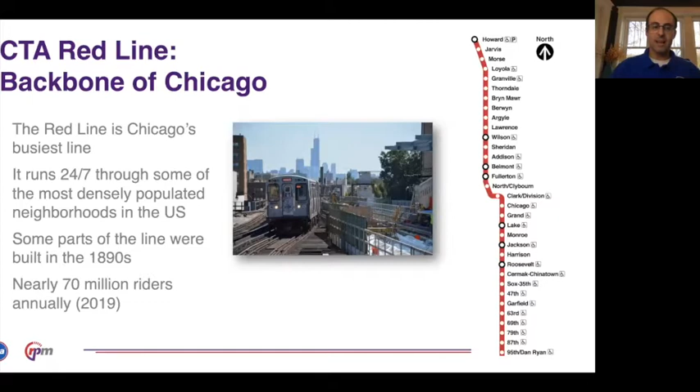Parts of the line date back to the 1890s. The parts that RPM is dealing with date primarily from that period, as well as the 1920s. Basically north of downtown, it is pre-war in vintage. The middle section in the State Street subway dates from the 1940s, and then the south end in the Dan Ryan Expressway dates from the 1960s. As I mentioned, it's CTA's busiest line, with 70 million riders annually last year.

So the RPM project, Red Purple Modernization, actually involves more than just the red line. The complete umbrella program will rebuild all red and purple line stations and track systems all the way from Linden, at the far north end of the purple line in suburban Wilmette, through Evanston, through the north side of Chicago, down to Belmont.

That corridor from Linden to Belmont is 9.6 miles. Reconstructing that entire length not only would be incredibly complex, but expensive to do all at once. So the project is broken up into multiple phases.

The goal of the project is to add capacity and, of course, to prolong the service life of the infrastructure, most of which is reaching end of life.

The current project is really just phase one of RPM. It began in 2019 and will run through 2025. The areas which I'll go over in just a moment for phase one were chosen for the initial project because they will bring maximum benefits to CTA customers across the rail system.

Parts of it were some of the most deteriorated, but they also, being at the south end of the corridor, will benefit not only customers who actually live in the immediate project area, but the customers coming from farther north in the corridor all ride through this section. So the capacity improvements it will bring, as well as the improved infrastructure, will benefit everybody who rides through that corridor.

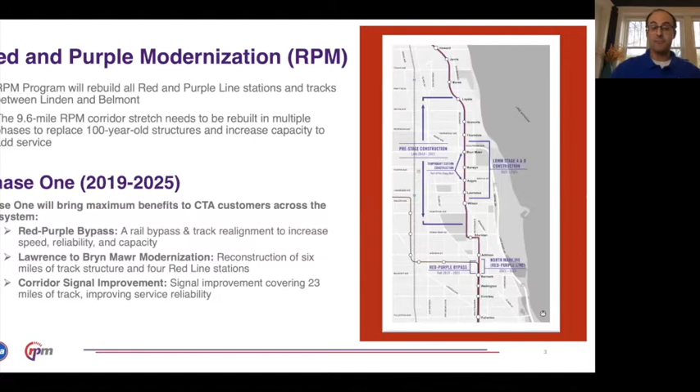The Lawrence to Bryn Mawr Modernization is the reconstruction of 6 miles of track structure and 4 red line stations, a little bit farther north between Lawrence and Bryn Mawr stations. And then the corridor signal improvement improves the signal systems across 23 miles of track, which will improve service reliability.

So phase one has benefits to both riders and the larger community. The new track structures, bridges, viaducts, and signals will provide faster, smoother rides. They'll also be quieter, so we'll be a better neighbor to the communities that we operate through and next to. They will permit more frequent and less crowded service by increasing the capacity through the corridor.

The 4 red line stations in the Lawrence to Bryn Mawr area will be rebuilt to not only be in better condition, but brighter, safer, and fully ADA accessible.

Besides the physical improvements this will bring, it also brings economic development and growth, both through our investment in the system and in the communities, but also through workforce development. The construction brings a lot of economic and work opportunities, particularly for increasing SBE and DBE participation. And then post-construction, there's going to be a lot of opportunity for transit-oriented development to bring investment to the communities that our stations and infrastructure will buttress.

The project, phase one, is funded through a few different mechanisms. The bulk of the federal funds come from the Core Capacity Program. We were actually the first recipient of Core Capacity funds. It was a capital funding program that the federal government created to help legacy systems like CTA that need investment in order to remain viable and efficient and in a good state of repair.

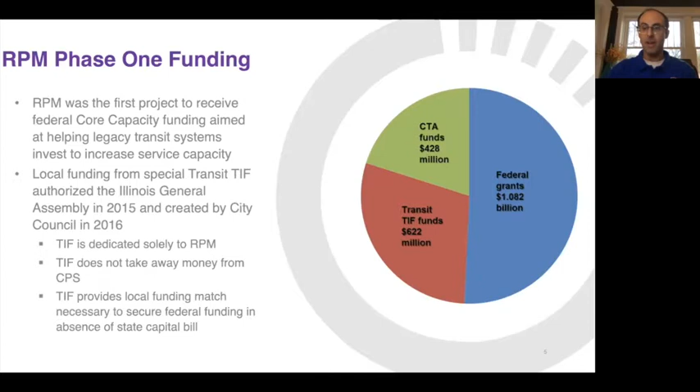Any property value increases that occur within the TIF district, CPS will see those benefits rather than all of that extra money going to RPM.

So some key issues and challenges for the project, and Chris is going to talk about these in more detail in the presentation further on, but just to touch on them briefly.

One is replacing a 100-year-old structural system is always a great challenge. It's a challenge for staging, it's a challenge for what you're going to find, particularly for a lot of the distance in the LBMM area, the Lawrence to Bryn Mawr area, which is a solid fill embankment.

So it's a little bit of a mystery box, sometimes what you find in a 100-year-old embankment like that. But it's also being performed in a densely populated urban environment, so this creates not only practical challenges in terms of getting material in and out and staging for construction, but also we have neighbors who are right against our work zones. We need to be good neighbors to those communities, so that provides a challenge as well.

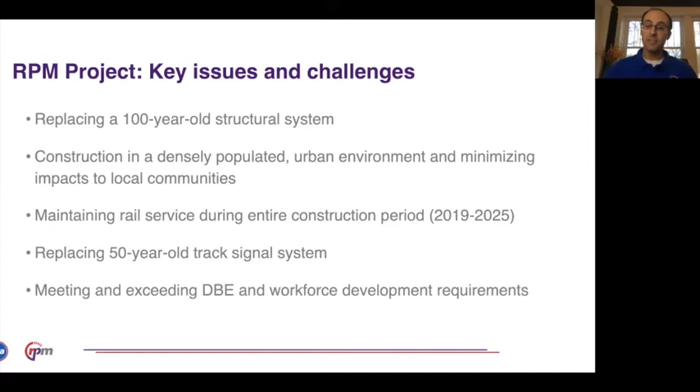Another challenge is that very few CTA projects are greenfield projects. We're rarely building on virgin land. In this case, we have to keep our busiest rail line, the Red Line, operating through this project, so maintaining rail service during the construction period is a big challenge. Replacing the 50-year-old signal system and systems integration is always a challenge for a project like this. And then meeting and exceeding DBE and workforce development requirements also poses some interesting challenges.

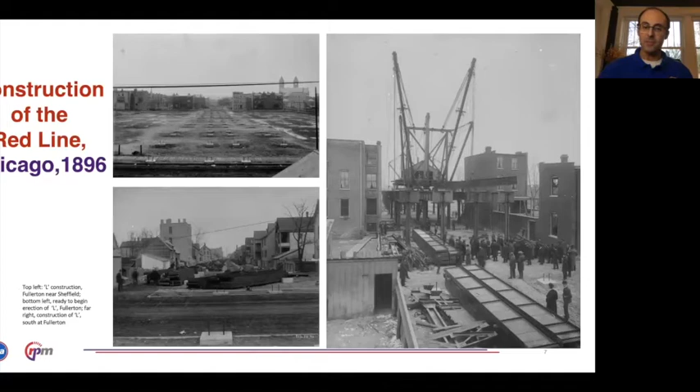So briefly, just a few photos for some context. As I mentioned, some of the infrastructure we're dealing with dates back to the 1890s. Here we see the construction of the southern portion of the project area. Top left is construction of the 4-track elevated structure near Sheffield and Fullerton. Bottom left, same area, ready to begin erecting steel, which you see on the ground. And then on the right is the hoisting and placement of the steel structure. So this is what it looked like when they built what we are now replacing 100 years ago.

At this point, I think I'll turn it over to Chris to speak to the current conditions and dive into some of the meat of phase 1.

Well, thank you, Graham. I want to talk for just a second about two people who are key to this project, one of whom is Graham Garfield. So many of you know Graham through this organization, and what an amazing job he's done with the CTA for a number of years. He has a unique position with this project in interfacing with our operations group, as well as providing important day-to-day communications directly to our passengers, coordinating those communications going out through our various operations outlets, and then coordinating a larger message with our media and government community relations folks.

But also in advancing many of the standards for communication and signage that we see in the stations. So those of you that know him know that he doesn't need a lot of introduction in terms of the various roles he's played in the CTA. He has quickly become a key figure for us as we expand our presence on the railroad and need to have an incredible amount of communication and coordination with our major operations groups in rail and bus. And that, along with his historic perspective on the CTA, makes him an invaluable part of the project.

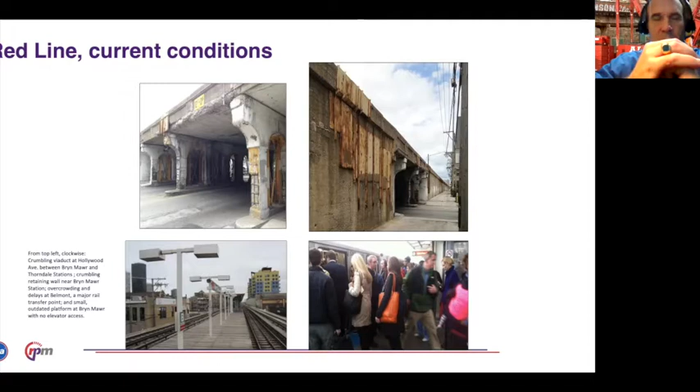One driving reason we selected this stretch, the Lawrence to Bryn Mawr segment, rather than the northernmost of the main segments, is because it was one of the largest blocks of inaccessible stations in our system, and an area with a lot of transit-dependent folks who weren't able to use transit efficiently, because many people with physical disabilities had a hard time getting to and from some stations. So breaking up that block not only provides better throughput, better stations, and the developments Graham listed, but it also breaks up this block of inaccessible stations on the northern end of the Red Line.

So, key dates. We started this project in 2018 with advanced utility relocation. For those of you involved with Metra or other transit agencies, clearing your utilities out of the way in advance, plus purchasing all your real estate in advance of bringing your contractor on, was a key part of this project.

I talked a little about Steve earlier — this was something he really helped set up and bring about. It was a brilliant idea that has worked very well for us. We've eliminated many, if not all, of the major utility conflicts we would have faced on a job like this had we not designed and planned ahead of procurement where the structure was going to go, how it was going to work, and then cleared the utilities.

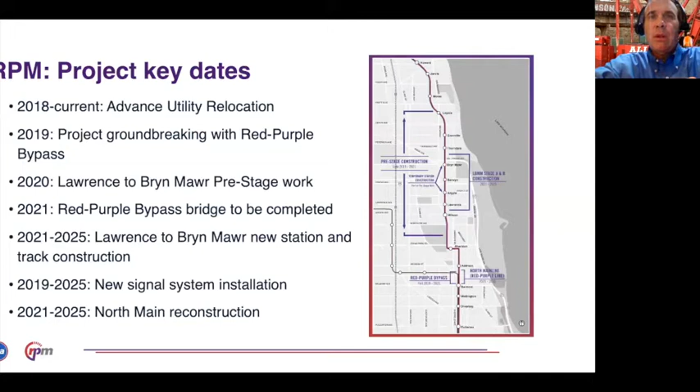What we're endeavoring to do with the bridge under is to take out some of the most prominent of those restrictions, again increasing our ability to provide throughput, and ultimately to provide safer and greater capacity to our customers.

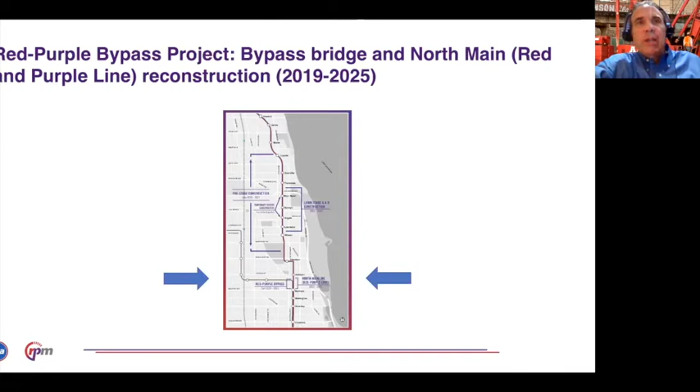Okay, so we're going to talk a little bit about the bypass. This tour, if you can call it that, sort of starts at the south and moves north. So with that, we're going to start at the bypass. So we're adding capacity. I would guess that most people understand the basics of this project. I'll just say this rather than reading through the points here.

The last time any of you saw a stoplight in the middle of the Dan Ryan or the Kennedy Expressway was probably 70 or 80 years ago, a stoplight at either end or near it. Yet in some of our major railroads, we have stoplights in all sorts of places, flat junctions that create conflicting moves between the trains and severely impact our ability to maximize throughput.

So it was pretty clear that Clark Junction was one of those that constrained predominantly the Red Line trains from reaching full capacity, but also the Brown Line, to Graham's mention earlier. So putting this bypass in was an important part of improving throughput in this corridor.

I'll also say that in designing a major piece of infrastructure like this, we took into consideration the aesthetics. We had one of the leading architects in the city, EXP, working on this particular aspect of the bridge, as well as some of the stations that we'll talk about in summary later. But we took great care to introduce aesthetics that not only were beautiful of their own accord, but also endeavored to break up the massing of these elements to make them seem a little bit more friendly and integrated into the environment.

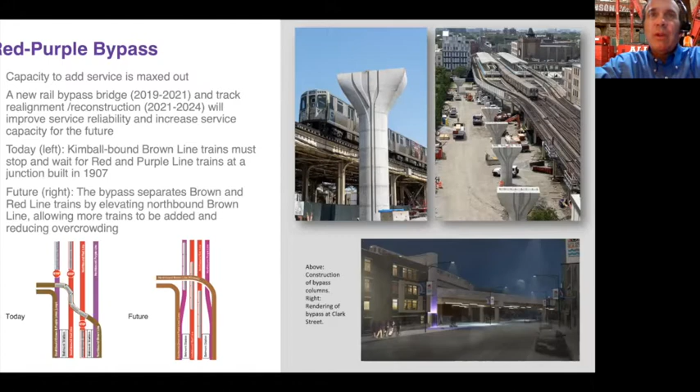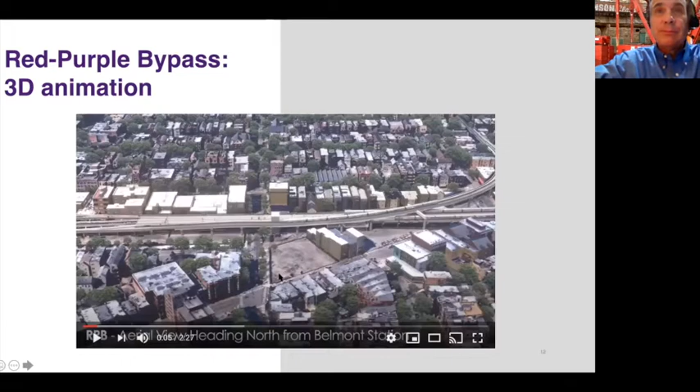Next. So we have an animation. I will endeavor to narrate it a little bit so you get some context. This is, again, a narration of the bypass, predominantly both the bridge over and the bridge under. All right, so you can see this is an aerial view of how Clark Junction will be configured after the bypass is completed. You can see a Brown Line train moving north here. This was the move that created conflict between the two lines, and now is free.

You can see here now we're on a Purple Line train, and we're on the tracks under. Those of you that have taken a careful look at these tracks over the years will notice the absence of the vertical and horizontal curves as this Purple Line moves through this area much smoother than it has before and approaches the Belmont station on track 1.

All right, so now we have a brown line moving up and over. That is Clark Tower to the left. You'll notice that we conveniently miss it and come up and over the tracks now instead of those conflicting moves between the Browns and the Reds.

You'll notice as well, this continues our development of closed deck trackage, which, as Grant mentioned before, offers us both maintenance improvements, ride improvements, as well as less impact to the community in terms of noise. Those of you that have had the opportunity to use the Wilson station and have had a moment maybe to stand underneath that station will appreciate what closed deck can mean to a community, as it's much quieter underneath it. You can actually talk to someone, which maybe isn't the case if you're downtown next to an elevated station.

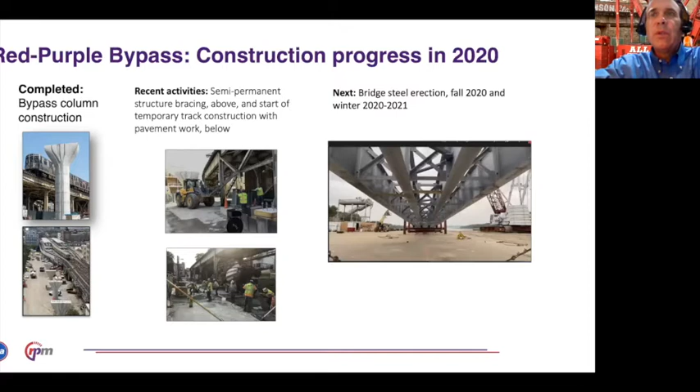So construction progress, you've seen pictures of these completed, what we call the tulips, the bypass column construction. Recent activities, we have done semi-permanent structure bracing, temporary track construction, pavement work. And then I mentioned a second ago as well that we started the erection of the steel for the bypass. This is a picture of the steel a couple of weeks ago in its setup yard in Missouri. You can see the Mississippi River behind you there in the photograph. This steel is now, at least half of it, on top of a couple of the columns in the bypass area.

So one of the advantages, next slide, to design build is that we can move pretty fast in construction and design it. And we have for a partner in this effort Walsh Fluor, Walsh obviously one of the best national infrastructure companies, I would say, and Fluor, one of the best international companies. Both are making a significant impact in bringing this project forward. I will say that it is great having a hometown constructor here. Matt Walsh has taken an interest in this project, follows it, appreciates the hard work that we're all doing as a team to advance it, and has supported it, I think, as much as any owner and contractor can support and not only make the project happen, but go that extra distance. As we all know, it's necessary in this type of work.

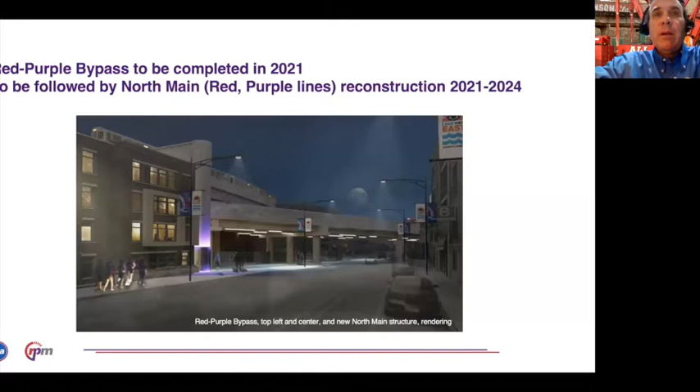So here, I think, you get a little bit more of a picture of how we've concentrated lighting in areas of pedestrian access, how we've tried to create decorative elements that call attention to the infrastructure in a positive way. And generally, like I said, try to create a room rather than just a leftover space that is a place where garbage and other stuff congregate, right? This is a place that people can walk through. It's a place you can have a business next to, a restaurant, and feel pride rather than necessarily just impact. So next slide.

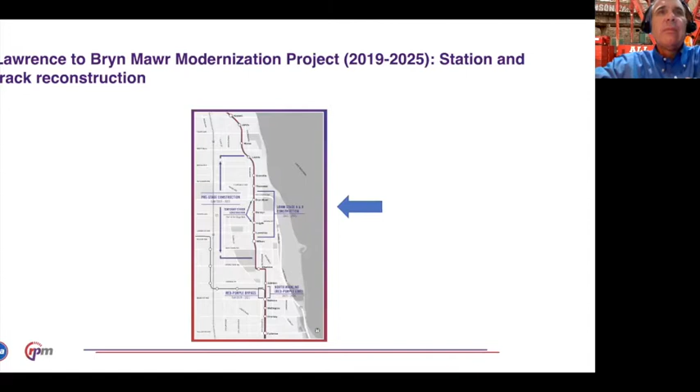So moving north, the Lawrence to Bryn Mawr Modernization station and track reconstruction. This is a unique section because we're introducing a couple different technologies here, one of which I'll talk about. Not introducing, it's been done before in Illinois, but not commonly. Next. It's a segmented box girder.

So we are building 4 fully accessible stations, Lawrence, Argyle, Berwyn, and Bryn Mawr. We are reconstructing century-old track structure and repairing the embankment, although I'll say predominantly with a segmented box girder, we're dropping caissons through the existing embankment structure, and it really becomes more decorative than anything else because we're taking the load off of it by virtue of the installation of those caissons. That said, we're repairing the components that remain. You saw in earlier pictures what they look like now. So we're obviously not going to leave it there. And in many cases, big chunks of it get removed, and then the pieces that remain get repaired. But again, they don't continue to really carry any load because of the segmented box girder and the caissons underneath it.

2020 has been mostly pre-stage. We have, as I said, done 2 extended reroutes and then a lot of weekend work, but the extended reroutes, not something we could have ordinarily done under pre-COVID ridership, enabled us to accelerate the installation of 2 very important interlockings to the north and south of this segment. Next year, we look forward to the new station and track reconstruction beginning. You'll see a gantry crane out there, which I'll talk about in a little bit, and the reconstruction, and then subsequently the stations, and we'll start more completely the new stations in phase B. In 2025, the construction of stations and track will be substantially complete. Next slide, please.

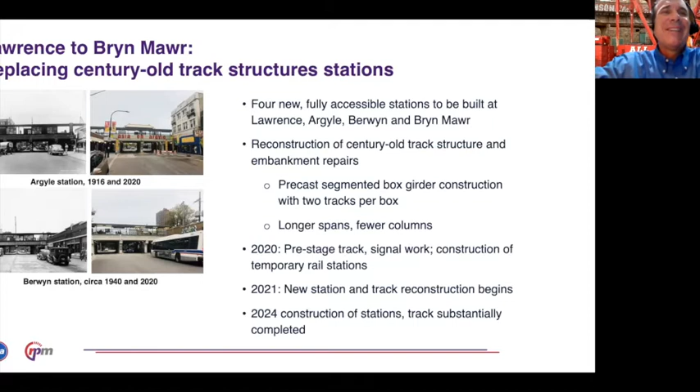I talked a little bit about this. I don't know if there's anything. We have 2 temporary stations. As I said to a bunch of people who have asked questions from the community, no, none of these stations stay open while we're reconstructing them.

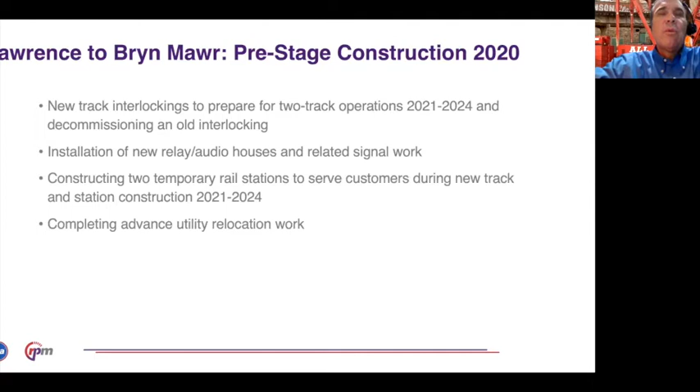The reconstruction is so complete. What we're doing is sort of shifting and creating temporary stations where we have real estate to be able to do that. So these stations are pretty close together. The location of the 2 temporary stations, generally speaking, still maintains a level of service that we consider acceptable. And then, of course, we're completing the utility relocation work. Next slide.

I'm proud of these interlockings. I've done a few of these, and they typically take much longer. There's a lot of teamwork that's required to get to this point. We needed a lot of support from our operations folks to do the extended reroutes, a lot of cooperation and quick pivots from our front office, as led by President Carter and his Chief of Staff, Veronica Alanis. And it has been a whirlwind activity.

I think one of the things we're dealing with now is just trying to make sure that people weren't too burnt out by this work, because it was an intensive design lead-up and then an intensive installation. And many folks on the contractor side were working 12, 14-hour days, 6 to 7 days a week. And unfortunately, the pace hasn't slackened a lot. So we are, at a project this long and this complex, thinking and talking about issues of sustainability within the staff. That's an important thing in a project this hard and this long. Next, please.

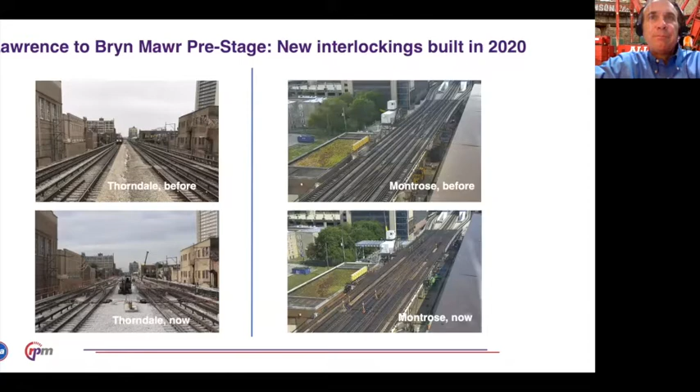Audio relay houses, that work is continuing. As I said before, one thing that's unique here is that our signaling system up there was not in good enough shape at the end of service life for us to be able to run the alternative service, particularly with the kind of headways that we required pre-COVID.

So as a result, we not only put the new interlockings in, we also put a temporary signal system in, but by all accounts, a pretty much state-of-the-art temporary signal system that would enable us to run alternative service on very narrow headways to put all of our service through that 2-track corridor where they earlier went through 4. It's a pretty big effort to install a signal system, period, let alone a temporary signal system.

And you might look at these slides and say, well, I don't see the temporary part of it. And you'd be right, because it is really temporary in configuration only. Many of the houses get repurposed for the new and larger corridor signal system to come. And they are designed in such a way that enables us to transition from an analog standard wayside signaling system to a digital one. And I'll talk about that in a little bit.

Some of these platforms and houses get repurposed in other locations as part of that corridor signal effort. But it is a big windup to the construction of the segmented box girder in the Lawrence to Bryn Mawr segment. Next, please.

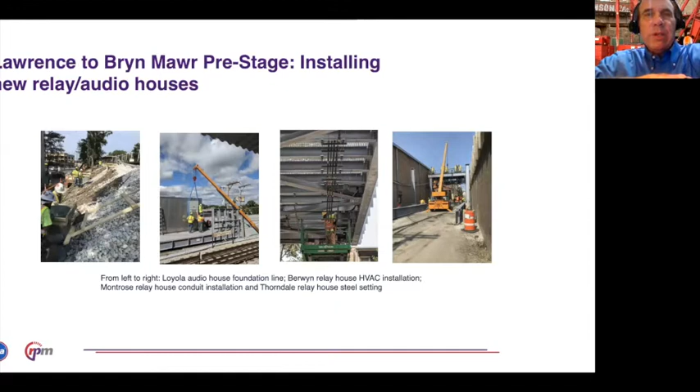Temporary stations at Argyle and Bryn Mawr. These are, I think, masterfully constructed by Walsh Fluor and designed by EXP, to kind of weave into the areas that we could find in and around the existing stations that would enable us to continue to build the new segmented box girder and the new stations while still providing service.

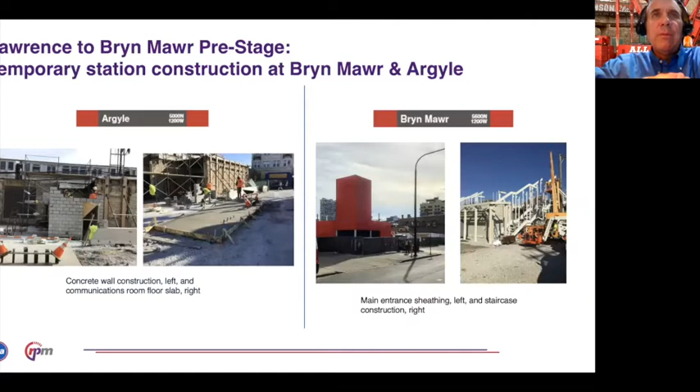But it still is a complex endeavor to make sure these stations can be built and available as we start phase A in the late spring of 2021, the construction of the segmented box girder Lawrence to Bryn Mawr.

So I talked about the gantry crane. So this came into the procurement as an alternative technical concept or proposal. And it was one that we ultimately talked a lot about. It wasn't allowed in our base specification. And it came in as a proposal, special to this contractor who had erected or put together many of them across the country. And it was ultimately something we couldn't ignore because of the savings involved. And the savings were significant in a number of respects.

They were significant in terms of the time for the entire project, and also in terms of the impact. You can imagine, this big crane behind us doing the erection right now for the standardized steel structure in the bypass area - if we had set that crane up adjacent to these tracks, we would have seen continual impacts to existing revenue service as it swung around and moved structure into place, plus impacts to the community from adjacent construction.

So not only did the segmented box girder offer us predominantly longer spans, we actually cut the number of caissons by more than half. It also reduced the impact associated with construction of those segments, and enabled us to have the quality control we see from pre-constructed concrete, which is constructed in the region and provides valuable jobs to the region in its fabrication.

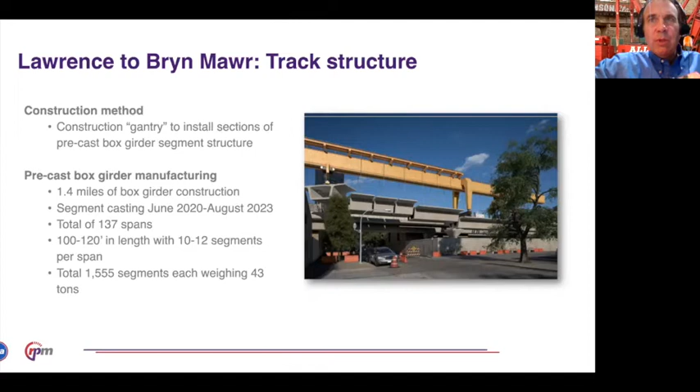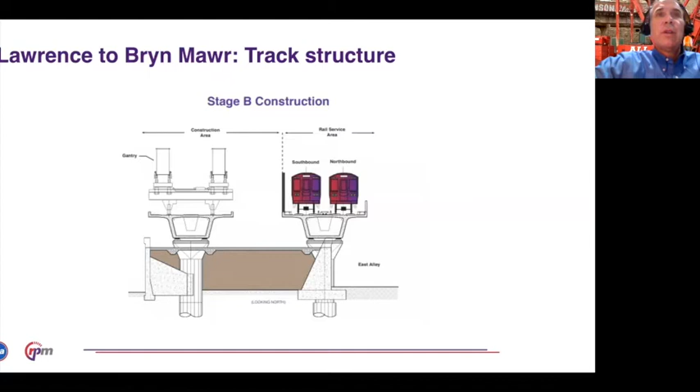We'll go through a few slides covering some of the geometry control. Here you get a picture of what this looks like and how we're constructing it - this is stage B. I don't remember the exact purpose of this slide, but I guess you can see how it's divided - we have a construction area and a rail service area in stage B.

Segment reinforcement - I'll go through these quickly, but if folks have questions about how this is done, there's been a big learning curve for the CTA. We brought in experts from across the country who have built these bridges, predominantly on the two coasts, to help us. We also have a brilliant precaster out in Morris, Illinois, UCP, who's done a great job, and a very solid general contracting team who's done great work with the quality and particulars of this.

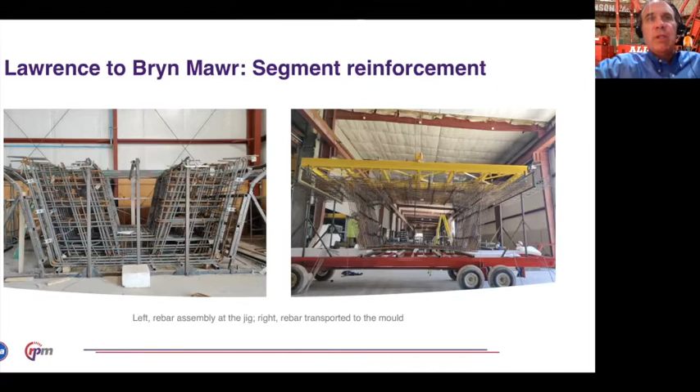A lot of this becomes about quality control, and we have a high degree of that here - much of it is the geometry of the individual segments and the type of systems used. This formwork you see around the rebar before the pour was all manufactured in China, then shipped to the United States. It was made by an Italian company with production facilities in China - actually manufactured in Wuhan, and held up a bit in the early stages of COVID, but all four made it over here, and we're currently casting on schedule for all the segments.

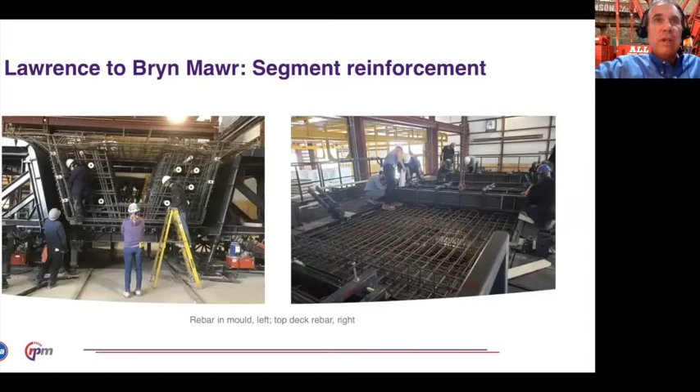An additional feature of this type of work is geometry control, which amounts to very carefully match-casting the various segments next to each other. So after the first segment, you always have an adjacent segment you're matching to, and you feed in all the coordinates from various survey points. A proprietary computer program adjusts the particular geometry of each segment so we get a high degree of precision in the assembly of the bridge components.

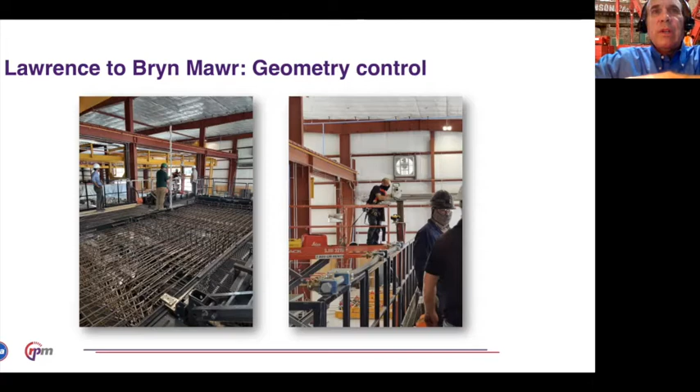Concrete placement - the factory out in Morris has a very efficient way of batching and making the concrete, then delivering and placing it into the forms.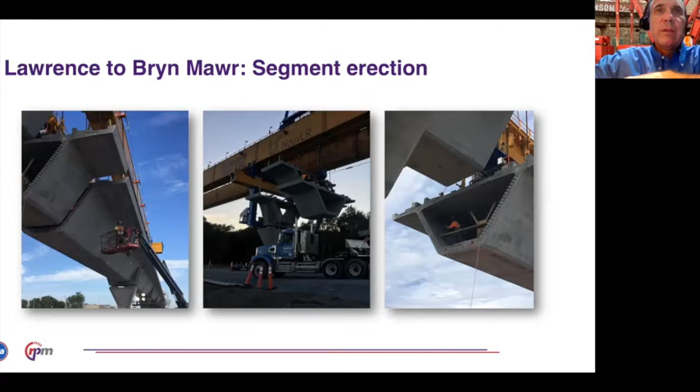Here we go. So, segment erection: install and anchor the gantry at the pier, then lift and adjust the segments.

I won't go through all of these. Again, if there are any questions at the end, the most important thing to bear in mind with this type of construction is the CTA—you can look at our recent efforts at Wilson and marvel at the amount of steel that's there, and I think it's beautiful. Also a Walsh-built station. But the amount of steel, the amount of resource, the distance of the spans—transit is never going to have the kind of money that the tollway has or that other highways have, even in jurisdictions that have tons of money like LA and New York.

And I think that we're always going to need to be industry leaders in adapting efficient technology, and where we can cut the number of caissons in half—something that is arguably one of the hardest parts of our construction—and get longer spans. We've basically doubled the spans in our RPM from 60 to 50 feet up to 100 to 110 feet. The fewer places we touch the ground, the more efficient our construction is, and the better and quicker we can deliver this process and project.

So the introduction of this technology to the CTA is...

I love steel. I think as you go down, say, Lake Street in the summer day and see the shadows on the street, it is a unique part of the history of this city. But I want transit to be part of the future of this city.

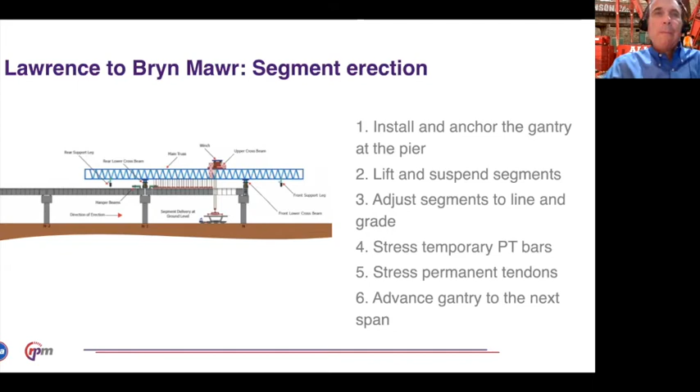Next. Details—if anyone has questions on grouting, I'm happy to answer them later.

So the new signal corridor improvements—this is an exciting thing. Signaling is exciting mostly because the industry is in crisis. It is desperately stretched thin between the work it's doing for America's freight railroads and the work it's doing for America's transit. There aren't enough people doing it. There aren't enough engineers that know how to do it, either for CTA or for various engineering companies, let alone the manufacturers.

So that makes signaling exciting as a project manager, start to finish. But what's really exciting here is that we are introducing, in a couple of different places—not just this project, but also our signaling project on the Blue Line—the digital track circuit to the CTA, which gives us a lot of the capacity of communication-based train control, but not the expense and burden of having to coordinate a signaling project with a rail vehicle project, something that would stretch the capacity of most legacy railroads.

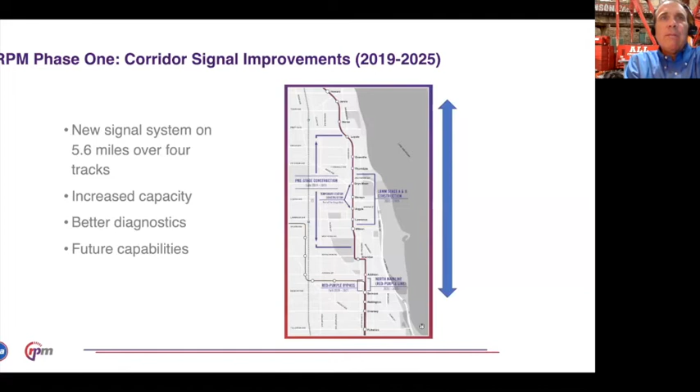Next, please. So we demonstrated, as part of other projects, having two signaling companies put in digital track circuits prior to bidding RPM. It was an interesting test, and we got a lot of good information from it. We ultimately went forward with two signaling systems, one with Hitachi and the other with Alstom. They're both frankly struggling to put the technology in place, partly due to COVID for sure.

With Hitachi, this track circuit is coming from Italy. It's been used extensively in Europe and is now being developed. We're very satisfied with it as a product, but Italy is a severely impacted country, and getting engineers over here and getting information back and forth has been complicated. Just in general, the industry is highly constrained by the resources that are available.

So the other one, Alstom, is facing a similar circumstance on the Blue Line right now. They are also very challenged in meeting the current schedule.

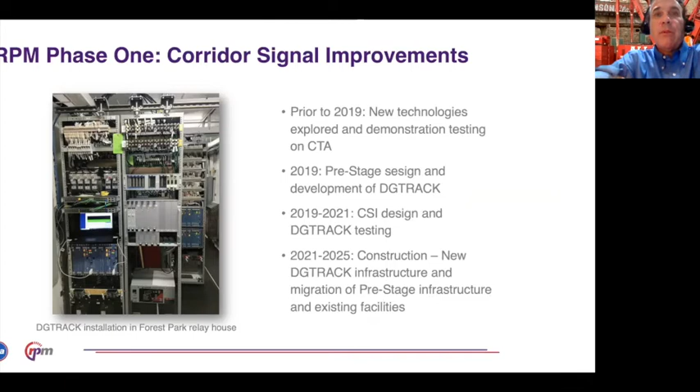So you can see here the timeline: '19 to '21, CSI design and digital track circuit testing. We've tested the digital circuit off one of our major revenue lines, and we're now getting ready to put it on test on one of our revenue lines. Then we will be installing it upon the successful conclusion of that test throughout. In the most near term, we've been installing a more standard alternative system, as I mentioned before, as part of our pre-stage effort. Next slide.

So one advantage to the digital track circuit is that we can move towards the functionality of communication-based train control more incrementally. This digital track system is configured to work with existing analog train car packages as well as future digital ones.

We don't, in the current configuration, get all the benefits. We really start to see those benefits come to fruition as we incrementally update the fleets, as we will incrementally update the fleet's car signal package. So we get to keep the existing cars in place. The system that installs the digital system will first be compatible with the analog car packages, and then later realize many of the benefits as we put in digital train packages.

So it's something that enables the legacies to move towards reduced headways and greater efficiency for our customers without having to do more wholesale vehicle replacements and timed purchases with new vehicles, which is tricky. It's hard enough to get the new vehicles out there. As many of you know, we're currently testing the 7000s out there.

We're testing the patience a little bit of our vehicle folks as we do work on the RPM, but they are finding their slots to run their cars. It's hard enough to bring those on board without trying to time it to a project the size and complexity of RPM, which is one reason why you see many of these projects fail on the national level, or at least be extremely stressed.

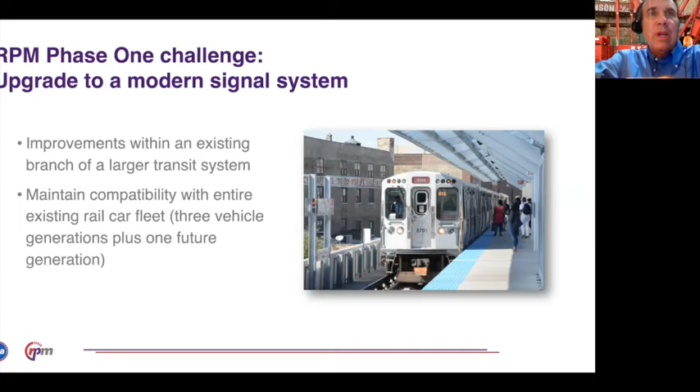The need to coordinate and commission all of that stuff is significant. So we've taken a more incremental approach that we think will give many of the benefits of communication-based train control without some of the costs and risk.

So the modern technology represents not just an upgrade to the system, but a step towards a modern system, including these features of the digital track circuit: train detection via secure messaging between transmitter and receiver, synthesized analog signals for cab carrier and cab speed codes, train to wayside communications for bidirectional data exchange, precision berthing, potentially automatic train operation, and red signal enforcement.

That is a big topic for us from a safety perspective. And then an Ethernet interface for communication with adjacent processors and to support remote diagnostics. That's probably a little bit in the future for us, but it is an important aspect as we become a more efficient railroad to be able to diagnose, understand problems and fix them as quickly as we can.

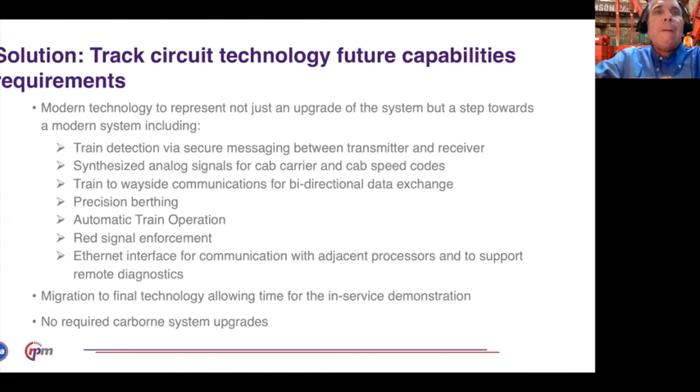So one important part of these projects, and certainly one that our board took a major interest in, and our political mentors took an interest in, was workforce development and DBE conclusion and inclusion. I think we set the bar pretty high here in a couple of different ways. One, we had 20% DBE for design, and then 20% DBE for construction, which was unique.

We had heard as we moved to design build at the CTA over the last few years, getting ready for this project, from some of our DBE designers, that they were being left at the wayside because the requirements didn't apply to them, and the contractors would find their compliance in some of the trades and ignore the fact that there were smaller design firms out there that we wanted to support as well.

So Walsh-Fluor has aggressively jumped into this. They are treating the goal as the floor and not the ceiling, so they're working to go beyond it. As these national projects go, it is a very high goal. Our partners in Boston, New York and LA, as aggressive and interesting as they are, have lower goals.

So we are, I think, setting a high watermark for this effort. And then we're also working a lot on workforce goals. We are trying to develop our opportunities for a broad range of the city. We're trying to make sure that as the CTA serves the city, so too are the jobs available to the people in all areas of the city in an equitable and fair manner. So we've worked very hard at this.

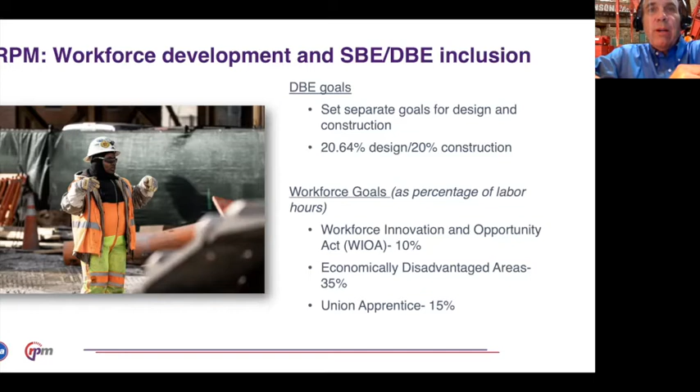If we can go to the next slide. We, I think, have some examples of specific stories. We have continually tried not just to come back to the numbers, the percentage of hours, but also some of the stories and some of the examples that people are setting.

One of the ways we were able to create lemonade out of lemons in these extended reroutes to put in the pre-stage interlockings was it also required the contractors to do additional hiring. Railworks, the subcontractor to Walsh-Fluor doing the track work, ended up hiring 15 individuals. As noted here, 9 were WIOA eligible, 4 were apprentices, and 11 were from economically disadvantaged areas.

We feel like this is just a necessary part of doing business, and it has been a big lift for us to work with the contractor. The contractor has had to put a lot of work and effort into it, but generally speaking, they have shown world-class leadership in advancing this as a goal.

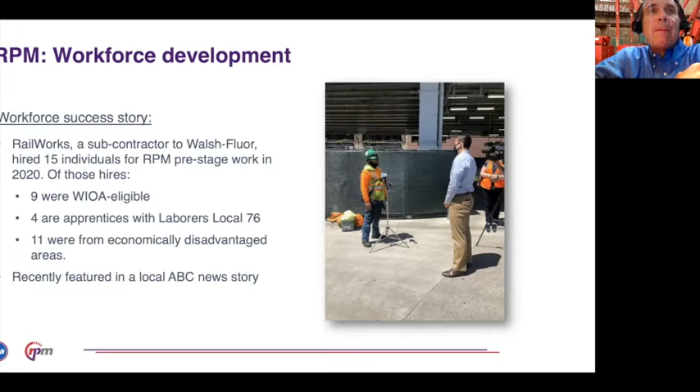Next, please. In terms of DBE inclusion, one of the success stories here is our building small business program, where we've sought not just to require the contractor to use DBEs, but also to build their capacity.

So what we've done is we've brought these contractors in. We've brought a vendor, and the contractors brought a vendor in, a great vendor who did similar work in Denver. Now we're doing it, taking their lead and integrating it into the CTA diversity effort. So we went virtual with it.

This is a great effort. Our diversity group has done a wonderful job. Tom McCone and Juan Pablo Prieto have done really great work in coordinating with us and with our contractor to maximize these opportunities. We feel this is a really integral part of any big project, to demonstrate not just the improvements to our riding public, but to the public as a whole, particularly those who have the biggest challenges on a day-to-day basis.

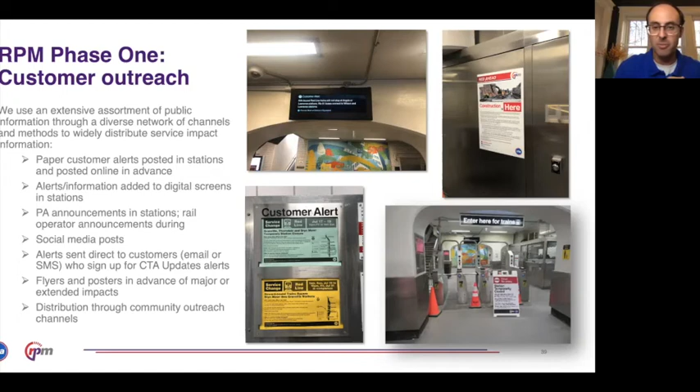For some bigger types of work, we'll also do some additional outreach, like flyering both in stations and in the community, put up posters and other types of additional materials that may provide more information or a little bit more context for why bigger impacts are happening. And then we use some of those community outreach channels that were mentioned on the previous slide, including elected officials and aldermanic offices to help distribute information, community groups and organizations, things of that nature.

Finally, as both Chris and I have mentioned, one of the big challenges of this project is that we have to keep running a railroad while we're doing this construction. And service has to still be regular, reasonably stable, basically have the carrying capacity and the attractiveness to still appeal to customers. So part of how we've made this a success is by baking in a lot of coordination back in the planning and contract phases.

When the project was being developed, the project team did a lot of meeting and coordinating and discussing with CTA's planning department and transit operations, bus and rail, to talk about what kinds of different reroutes were likely to be needed, how many would be reasonable, what could be done in what combination.

So it ended up being a rather granular list of different types of impacts, reroutes, single tracks, line cuts, things like that, covering not only what was allowed, but what could be done in different combinations. And so it gave not only the contractor a sandbox to play in, but also gave CTA's internal stakeholders a seat at the table early on, and then a guiding document later on. Not that that doesn't sometimes get deviated from, but it provides a good basis for those conversations.

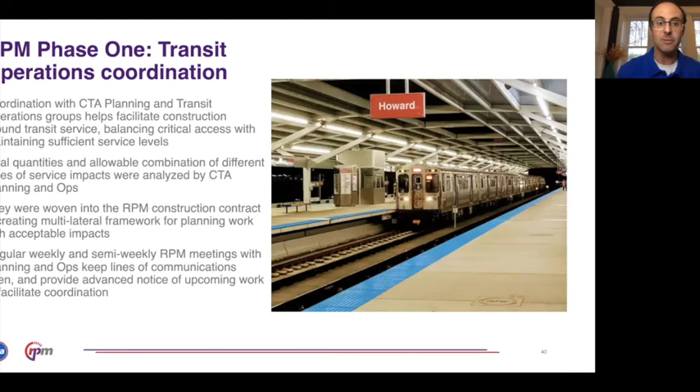So that relationship is very important, and it's one that RPM has really dedicated a level of attention and personnel to that's really beyond any project CTA's done in the past, and I think it's paid off for us in helping smooth the way for some creative solutions to some dynamic problems that we've encountered. So.